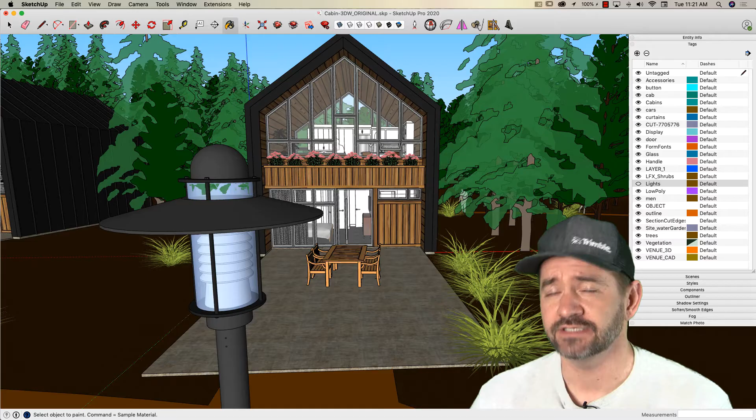Okay, so I have this model, this building right here that I want to export for rendering or render through an extension right inside of SketchUp. There's a couple main things I would consider when I start seeing if a model is going to be ready to be rendered or not. The first one, probably the biggest one, is my face orientation. Every face inside of SketchUp has a front side and a back side.

Renderers, generally speaking, will acknowledge and work with the front faces of a model. So the material that's on there will have reflectivity, or the light will hit it and it will render that way, whereas back faces are oftentimes just basically seen as flat black potentially, or even see-through depending on the renderer. So how do you check that in SketchUp?

The easiest way to do this is this button right here, Monochrome. It's also available under View, Face Style, Monochrome. What Monochrome does is it shows me my entire model with my front and back faces to their default material. All the white is the front faces. Anything that's this bluey gray color is actually a back face.

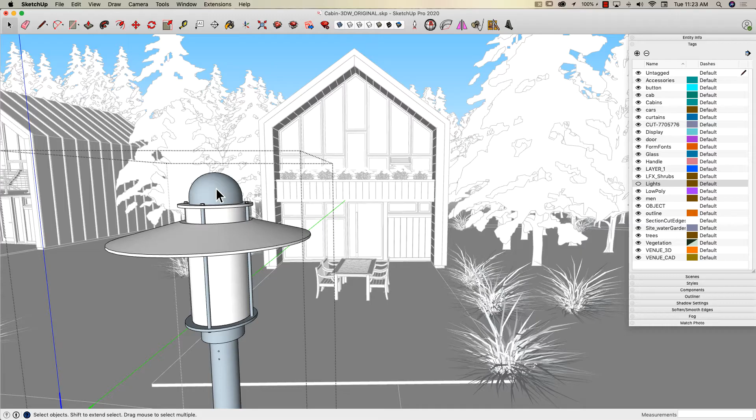So depending on the renderer I use, when I take this lamppost in, this top part and this part here might be invisible. I might have this section just floating right here. Or I might even see a flat black or bright white face here with no rendering on it at all. So using monochrome is a good way to come in here, click into your geometry, and reverse it so that it's the proper orientation for rendering.

So that's step number one, making sure that all your faces are the correct direction. Back here I have some more pieces I'd have to figure out. My frames, my window, I'd have to straighten all that out before I took this out for rendering.

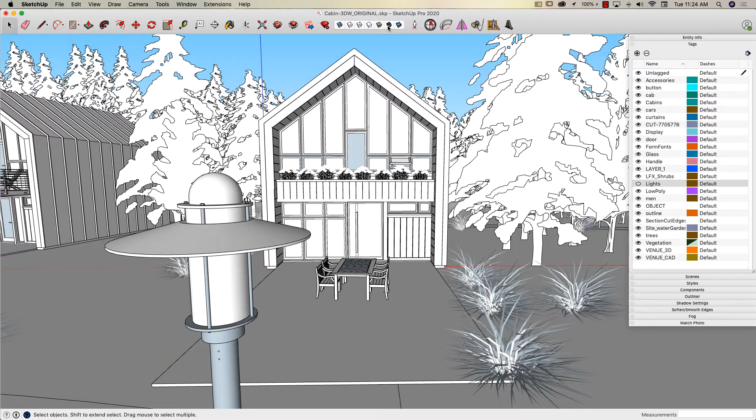The second thing to look at is materials. This is a tough one because different renderers work with materials in different ways. Some renderers will just take the geometry from SketchUp in, and you will be applying your own materials once you get into the rendering software. If that's the case, then pretty much do whatever you want. Leave the whole thing as one color, or put colors as placeholders.

Some people will color code their model: wood is going to be red, metal's going to be green, concrete's going to be blue. Others will use representative materials like SketchUp default materials. Some renderers will actually allow you to place render-ready materials right inside of SketchUp.

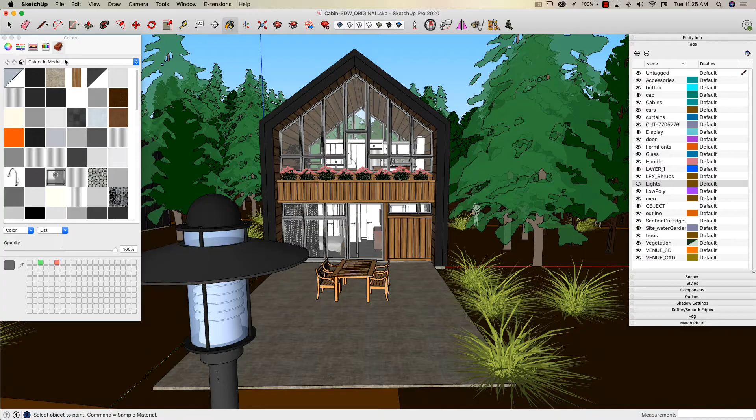If that's the case, generally it happens one of two ways. Either it will add folders to your standard colors drop-down, where you have a list of their colors, or through the renderer's extension, they'll have a tool to place their render-ready materials onto your model. Again, unfortunately, I can't say there's an absolute way to do that because it varies depending on the renderer you're going to use.

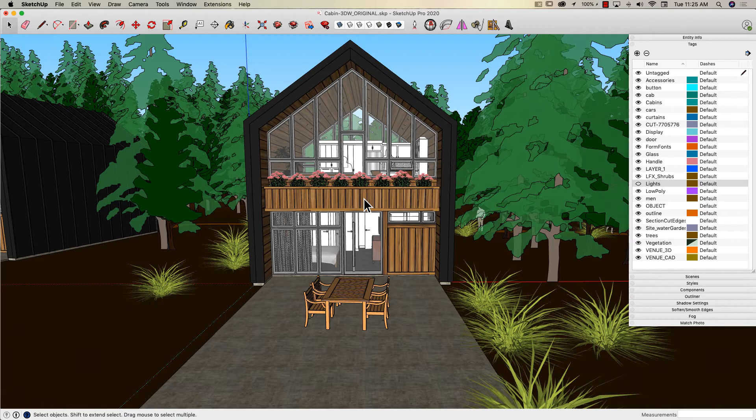The third thing you want to consider, and again, this is not one of those things that there's an absolute on, but it's a little more consistent across renderers, is lights. In SketchUp, when we look at shadows, we get a single light, a sun light source somewhere up in the sky that casts shadows on the ground. You don't actually see it, but it does change the colors that show up on the model.

Some renderers will acknowledge the location of that sun and create a new light representing that when you render. Others will not recognize that at all, and you'll have to place all lights into your SketchUp model. In this case, I actually have some lights here on this lights tag, so I can turn that on, and it'll show me these pieces that will represent lights.

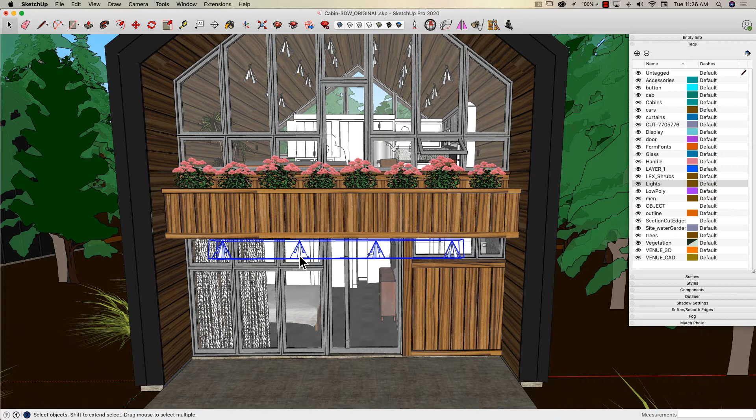So any place I have these downward facing can lights in this model, I went in and got a light facing down here. So when this actually renders in my renderer, it will be showing light from these pieces. I also have, with the rendering software, a sun up in the sky that's going to cast light down from above. So however it works, depending on your rendering software, you're going to want to make sure that you account for those lights if need be.

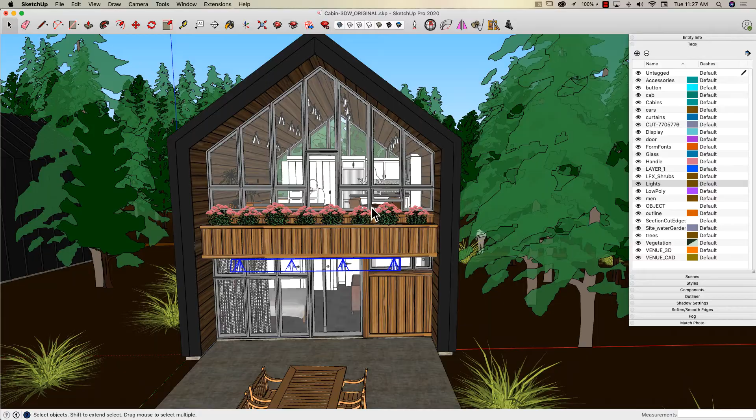Like I said, there are some cases where the software will recognize the sun, and if all you want is a daylight scene, no interior lighting, then you might be done at that point. All right, the fourth and final piece is all grouped together in Entourage. So when I talk about Entourage, I'm talking about all the things that are in the model.

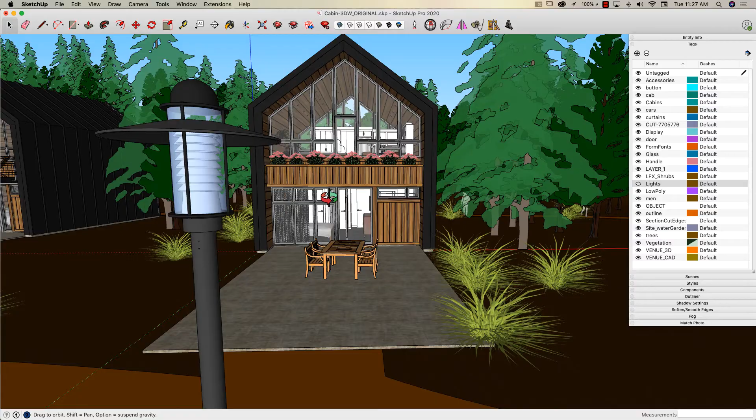How I set up my model in SketchUp might be different from how I want to actually export it into a renderer. So if I want to get a good shot right here viewing right into the house, I might be able to line up like this. Well, this lamppost is kind of in the way, so I maybe don't want it. So what you may want to do is delete or hide this lamppost just for the render. Same thing here, maybe I don't want this table here, I could delete that.

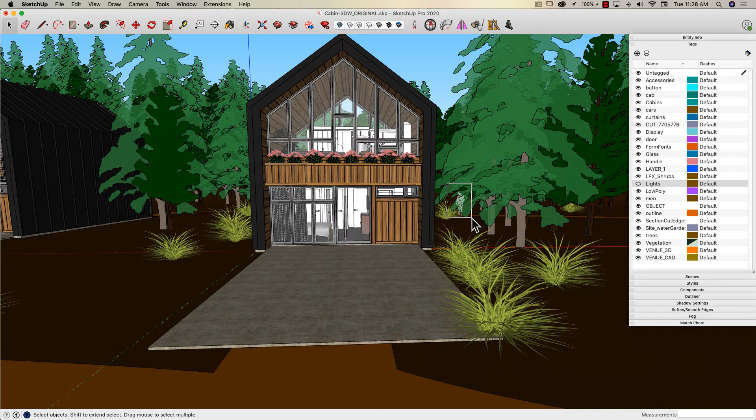And something else that's kind of weird here is I have some people. I have some entourage back here, and maybe I don't actually want these 2D people in my drawing, so I'll actually come in and delete those out before I go in and render. Same thing inside here. See, I have some people here. So that might look good for an image that I'm creating.

So when I go in and create the image that I want for the cover of my plan set, those people are perfect. But for my render, I might not want those ghostly outlines. There's a possibility that I do, which is perfectly fine. But if I'm looking for a photorealistic render, probably cutouts of people aren't going to be perfect.

The other thing to think about is things like these trees. These trees definitely set the mood for what I'm going to be seeing here. I can tell that I'm in kind of a pine, maybe a mountainy location because I got all these pine trees around it. But again, when I render, I might not want to see these 2D cutout looking trees. So it may be the time to swap these for high resolution renderable trees instead of my 2D face me's.

2D face me's are great, especially when I'm dealing with a big model where I have a lot of geometry, but when I actually go out to render, I might want to swap those out. That can happen manually or automatically, depending on what you have set up. Some renderers will allow you to automatically swap out proxies for renderable high-res items. Others will require you to do it manually, which would mean taking this component right here and swapping it for a high-res renderable component.

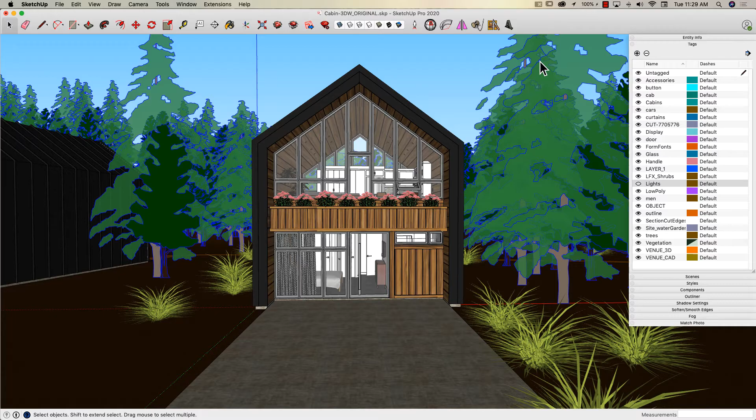Once you have all those pieces set up, you may want to consider doing this. Rather than having your working model be changed, you may want to go to File and hit Save As and save a separate renderable version of this model. So rather than making modifications, rendering it, and then going back, it's possible that I'll want to just change it once and then move forward with it. Either way, at that point, you're pretty well ready to hop into your render.

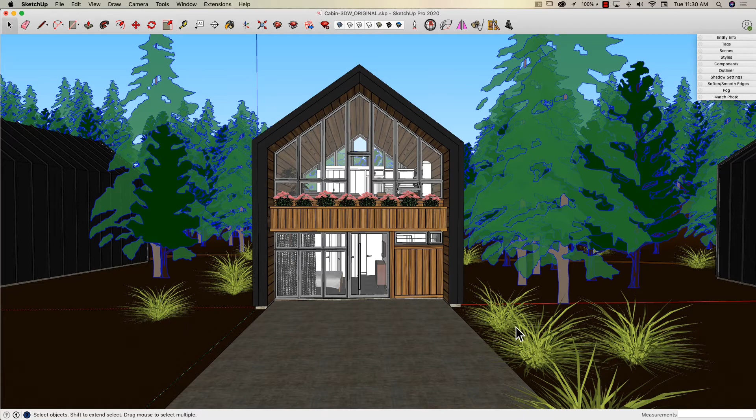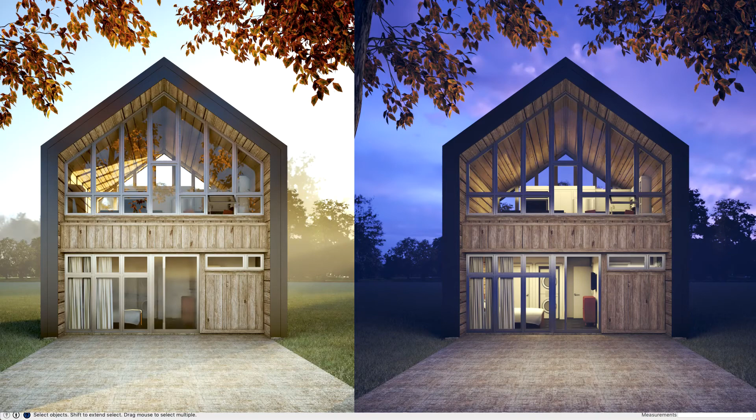The process of rendering from there is going to be different depending on which renderer you use, but it should be pretty easy for you to take that SketchUp geometry and create a nice render like these. So there you go. Like I said, I tried to keep that kind of generic because which renderer you use is going to change how you do some of those specific tasks. But generally speaking, those are going to be true for any rendering process you use.